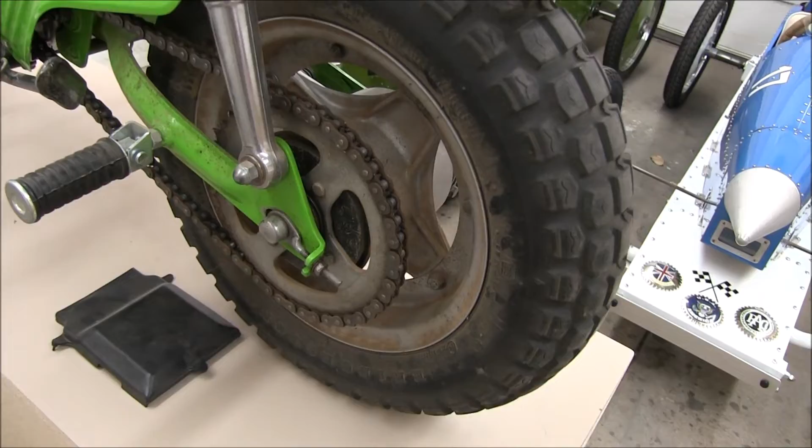Hello everybody. I thought I'd do a little video on my Honda CT70. I've had this thing since about 2003. At that time I took it all apart and repainted it and fixed it up, and I've put about 500 miles on it. It's been in storage for a while. I just dug it out, and you can see it's kind of dirty and needs some service.

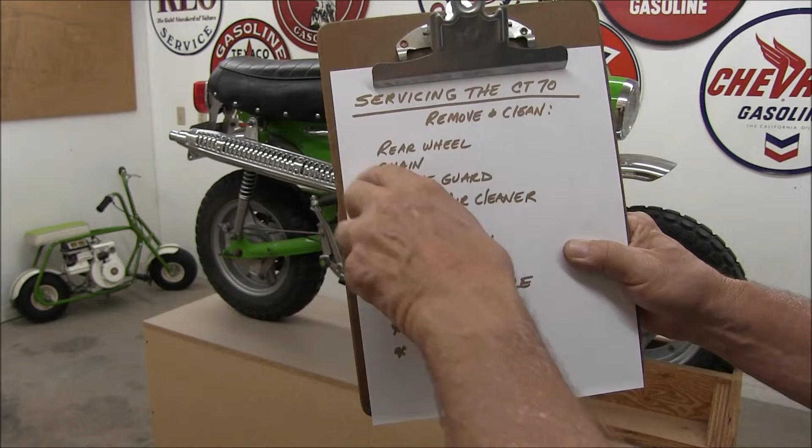So I thought I'd do a little video of the process. Here's the things I'd like to do to the CT70 to get it up and running. I want to remove the rear wheel and the chain, the engine guard, the carb and air cleaner, the battery, and the fuel tank. Clean all these items up, then clean the frame and everything else, reassemble it, get it running, and ride.

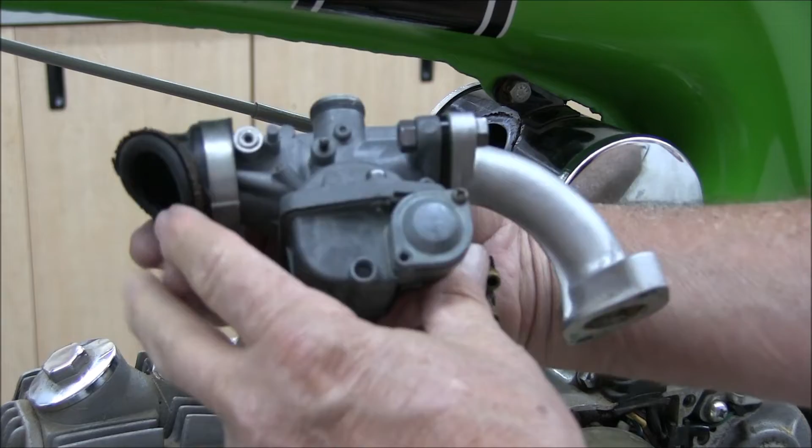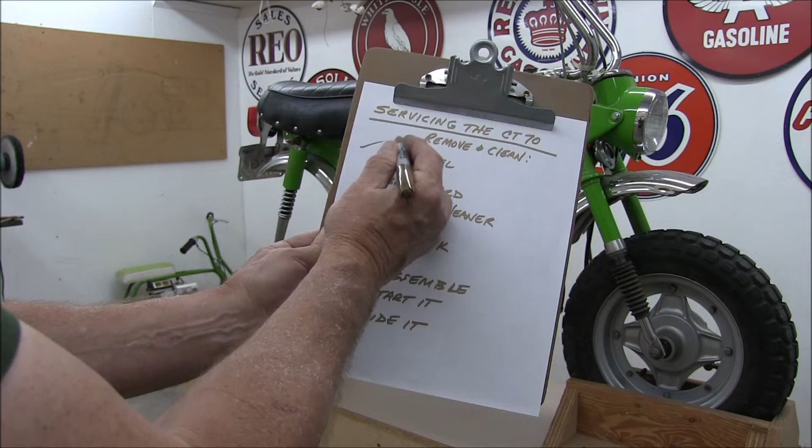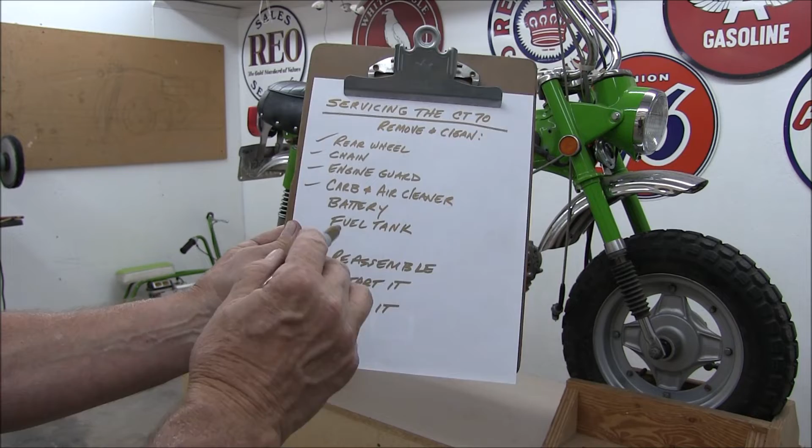Making progress here. Rear wheel, chain, engine guard, carb and air cleaner done. The battery and fuel tank are under the seat, so I'm going to work on that next. But so far so good. Everything needs a good cleaning.

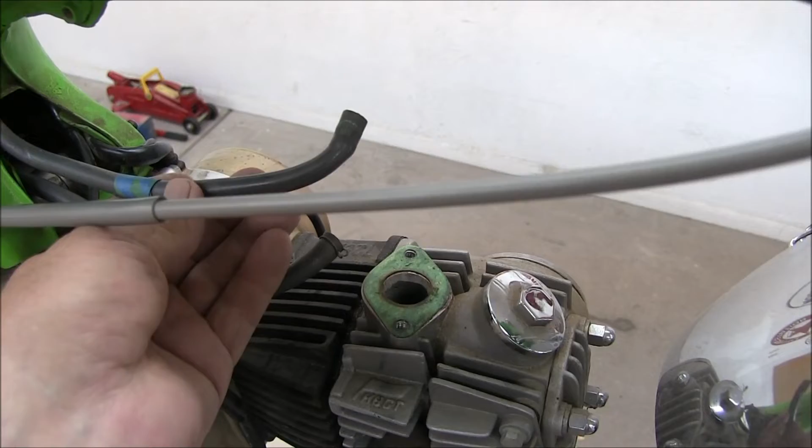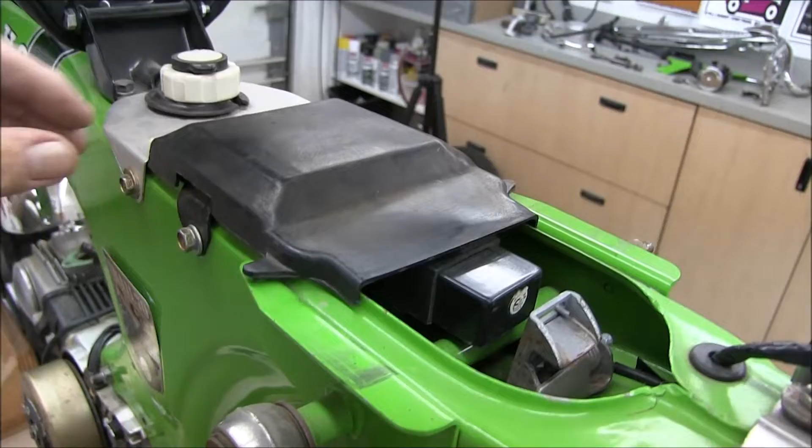So the fuel tank is inside here, and you can see the fuel lines coming out. This blue tape is the line that goes to the reserve valve, the reserve part of the tank. The tank is plastic, so it's underneath the seat. And then we've got this little cover here, and then to take the battery out, remove this plate. This is an electronic ignition for this bike. Anyway, this comes out, and then the tank can slide up and out.

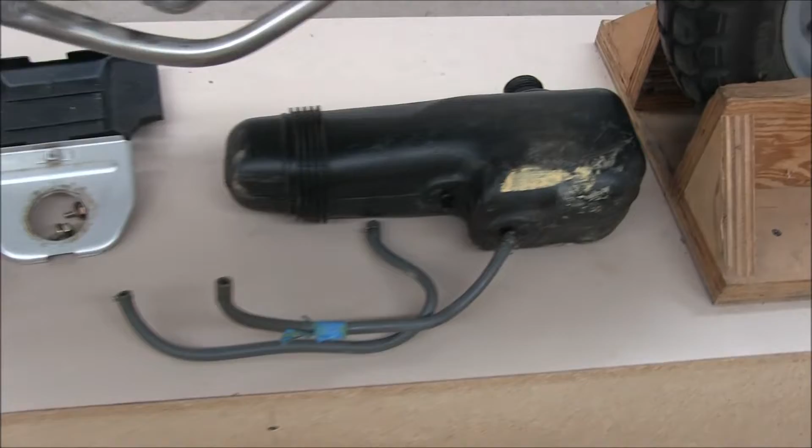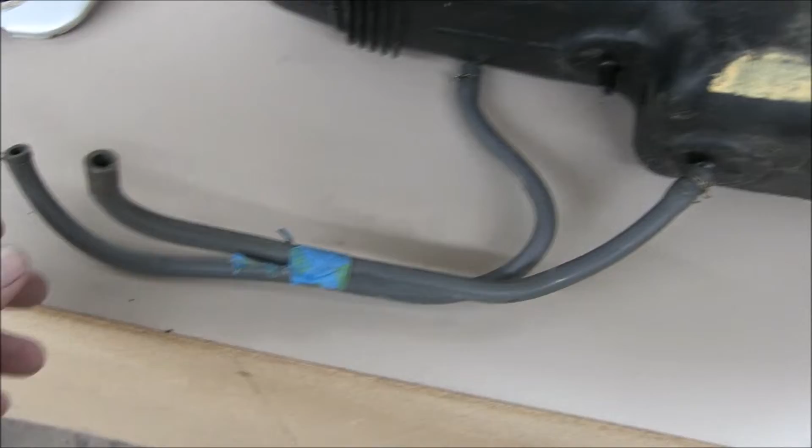So here's the fuel tank. Looks like this is broken right here. This has been in dry storage, hot in the summer for a few years, so these lines are hard. I'll have to get some new fuel lines. I think this is still long enough to work.

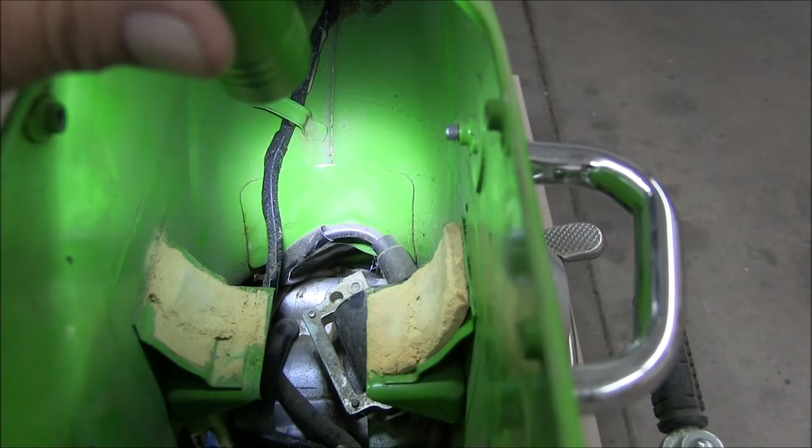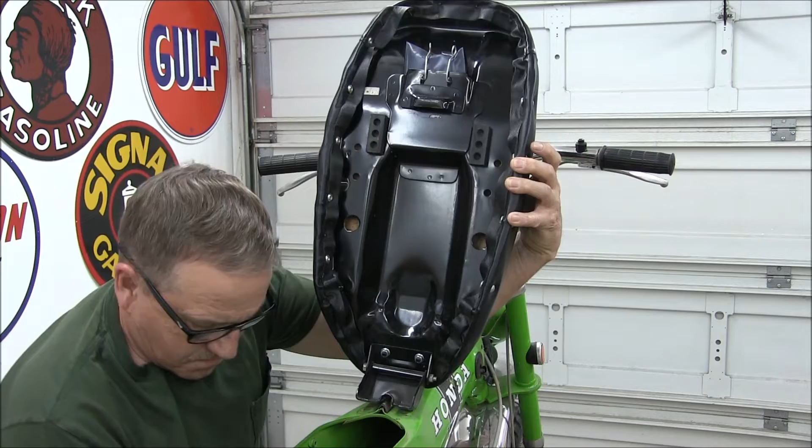This is the reserve portion of the tank. Here's the battery box and the battery. I think everything down in here will clean up all right. Here's all the parts laid out. Everything here will be cleaned and reinstalled. Won't take too long, I don't think.

So a little bit about this particular mini bike. Like I said earlier, I bought this around 2003 and it was a wreck. The engine was out of it in pieces. I think it was red, if I recall. I spent quite a bit of money buying parts for this thing, and I painted it a color I liked. I didn't care about originality per se.

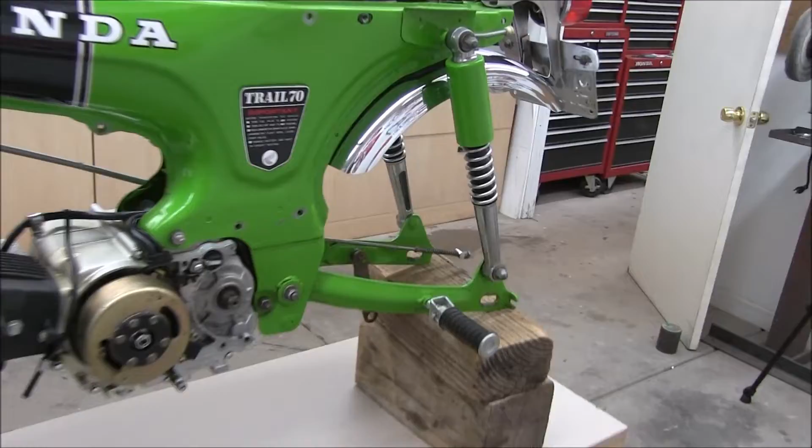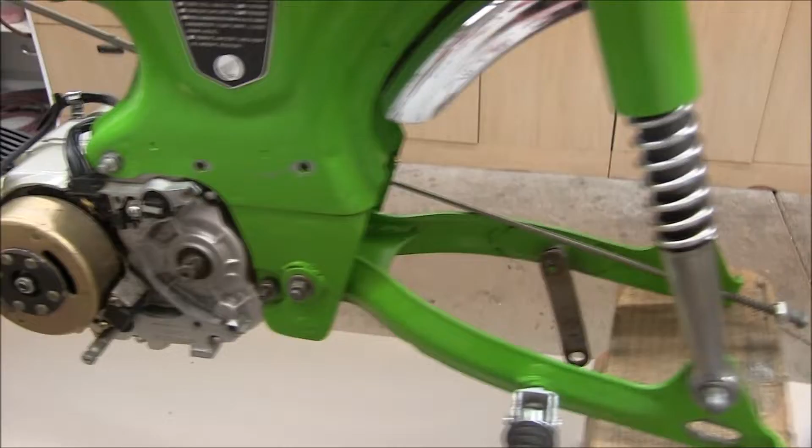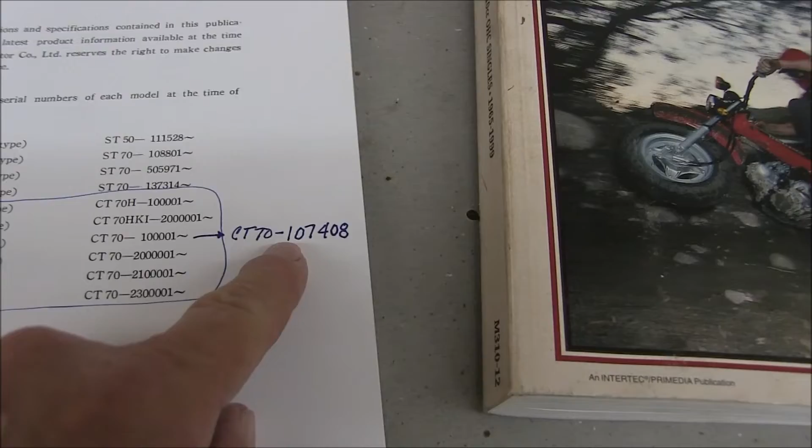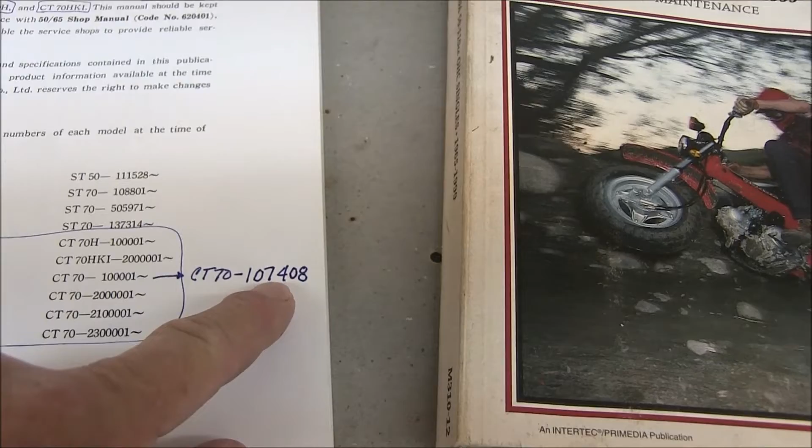If you look at the serial number, I don't know if you can even see that, but it's CT70 107408. So if I go over here, we've got this official Honda manual. So CT70 K0 is what this one is, 107408. So that's in the first 7,408 bikes, if I'm reading that right. So it's an early model. Could be a '69 or '70.

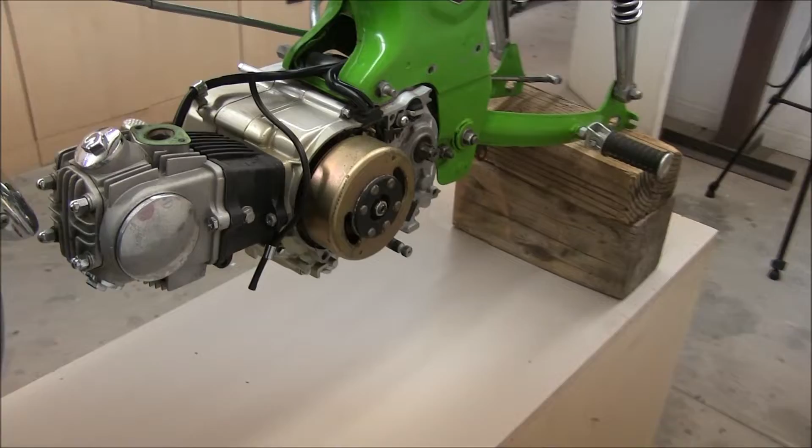Your basic 3-speed transmission. Now the engine that came with the bike was a wreck, so this I purchased, it's a Chinese brand, 70cc. And this is a 4-speed automatic, which I thought would be nice, but I should have got a 4-speed with a clutch. Still, it's nice having a 4th gear. It runs pretty good, it'll run 40 miles an hour, so it's worked okay. I can't complain, and it was a reasonable price.

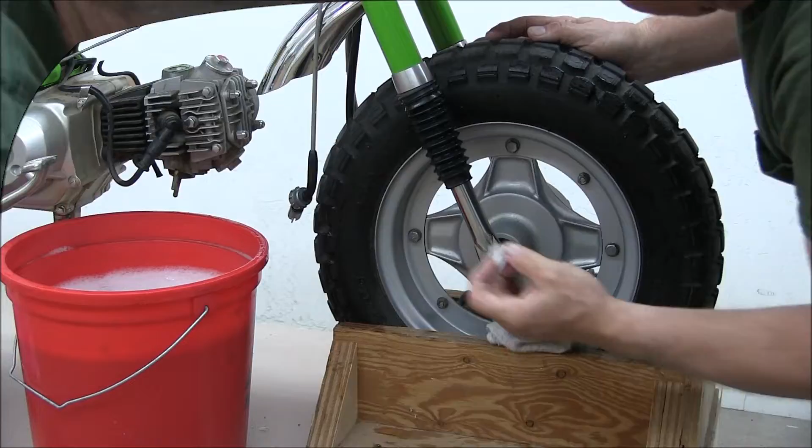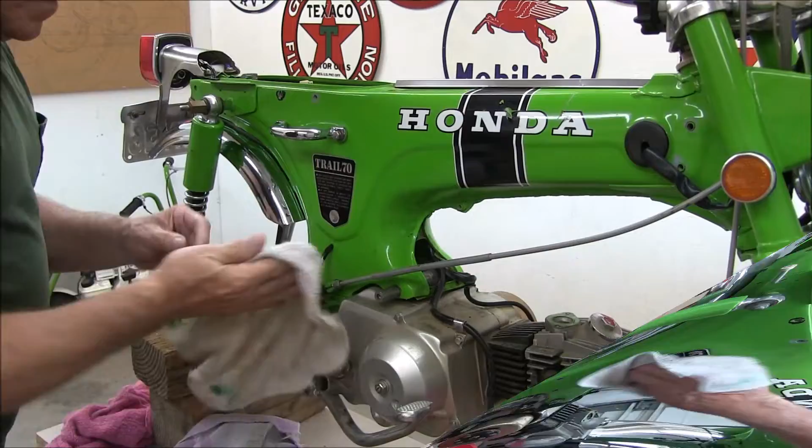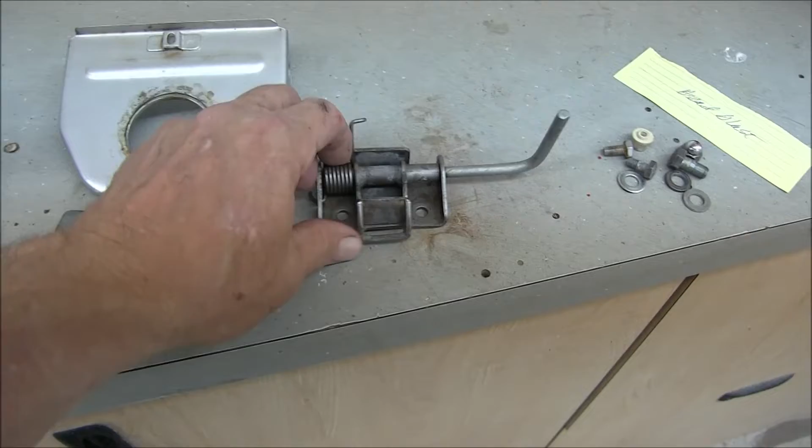Upon further inspection, there was quite a bit of dirt and filth, oil, fumes got up in here. So I decided to just go ahead and pull the motor. There it is over there. Here you can see why I decided to pull it out, it's just filthy. A couple of the items have some surface rust and corrosion, so I'm going to use the bead blaster, glass bead blaster, to clean it up.

The bead blaster does a nice job of cleaning up the parts. I'll just spray paint them, that'll seal them up again. So I'm cleaning the rear wheel now.

I've taken off the snap ring so I can take off the sprocket, and then the dust cover. And then there's these little rubber cushions in here, they just pop out. They're just in there loose fit. So I just have to clean all this up and it's ready to go.

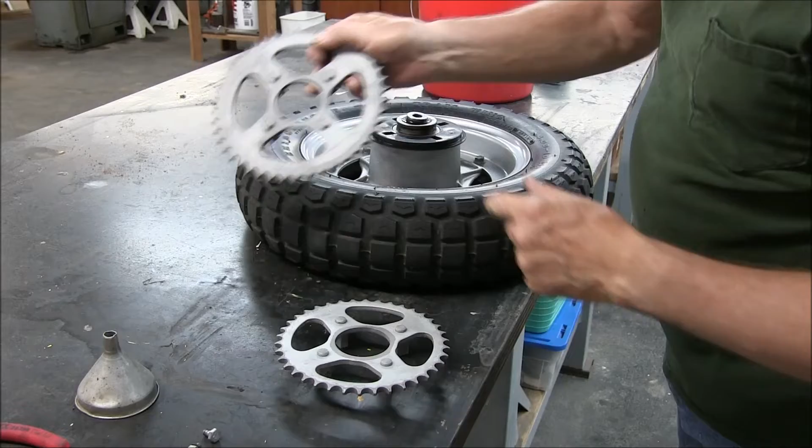Alright, I have things cleaned up now, so I can put it back together. One thing I'm going to do is change from a 45 tooth rear sprocket to a 38. This will give me more top end. This thing would only get up to about 40 miles an hour.

We mostly did trail riding and it was good for climbing hills because with this sprocket here you got good low end torque for climbing. But I like to go a little faster, so let's see what happens.

Okay, alright. Yeah, that'll be fun to try out. Okay, and then I cleaned this up and it's ready to go.

Okay, so the rear wheel is ready to reinstall.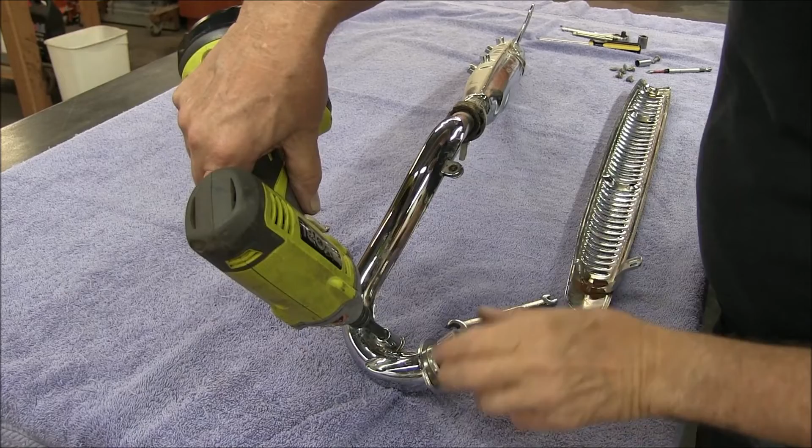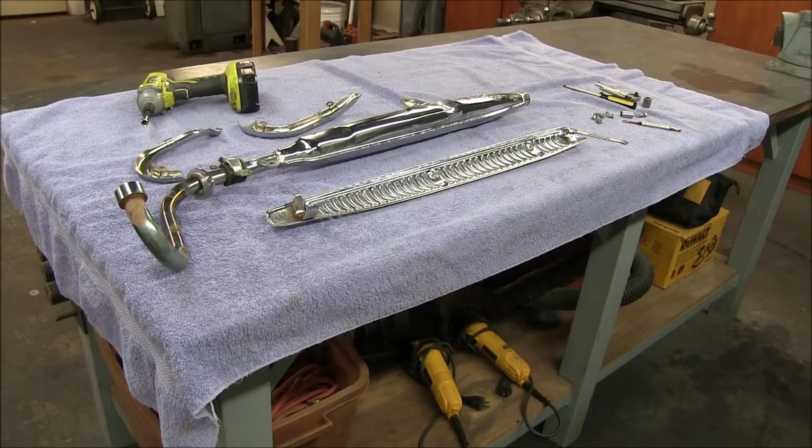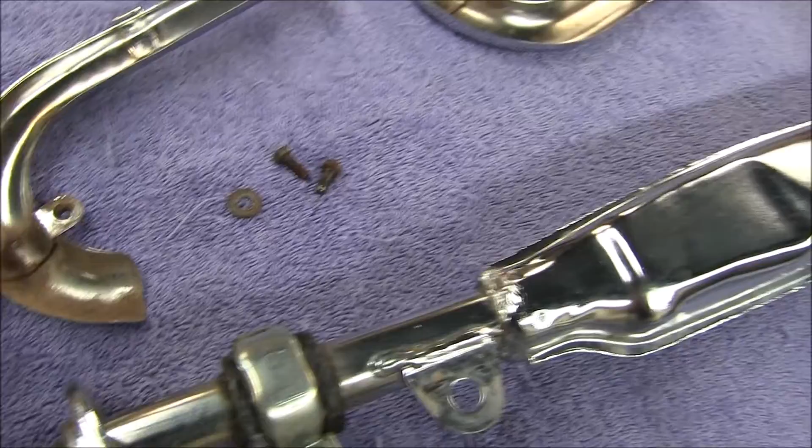Back when we were riding our mini bikes, we would ride rain or shine out in the trails. So dirt and corrosion got into a lot of areas. That's why I wanted to take this apart to get to all of this. Just get it nice and clean. Put it back on the bike, fresh.

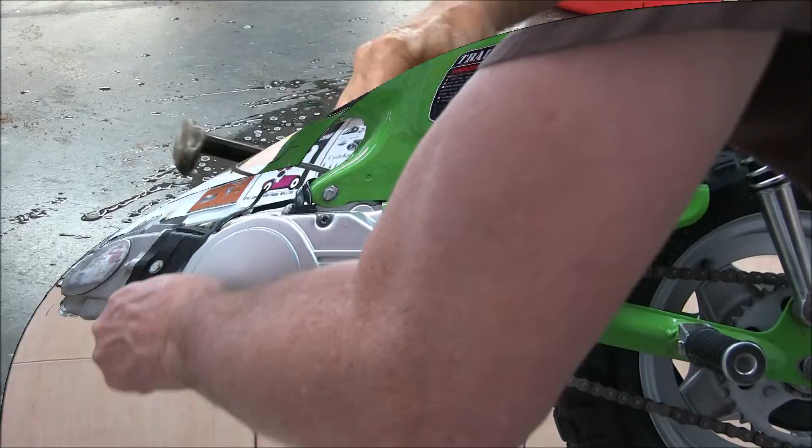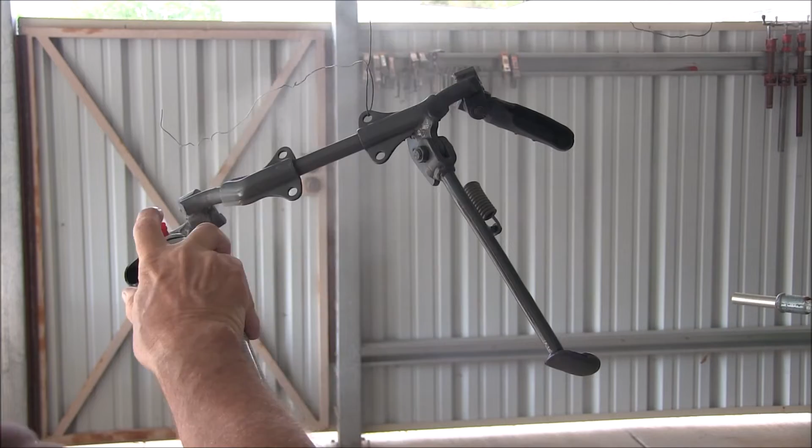Along with the battery, I received some other things I needed. I needed some new fresh fuel line. I like this gray fuel line, it works well. It also came with these little fuel line clamps, which work well with this particular tubing.

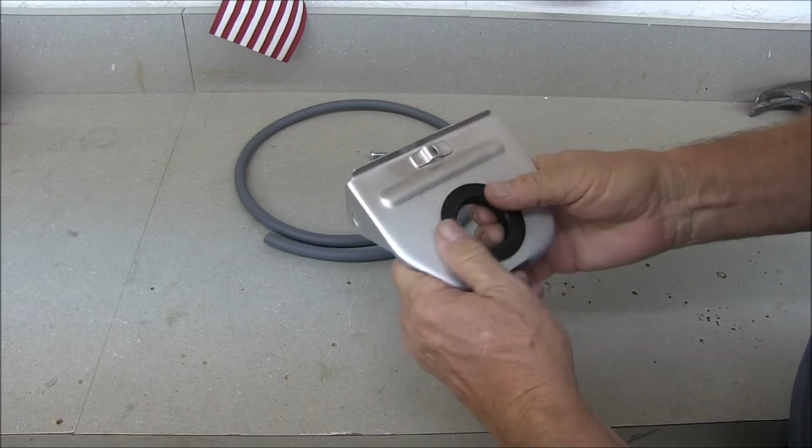And then I have a new screw for the side cover because the one that I currently have is all messed up here, so I got that. And then I have this new grommet for the gas tank, which fits in here. Oh yeah, that is nice. All right, glad to have that.

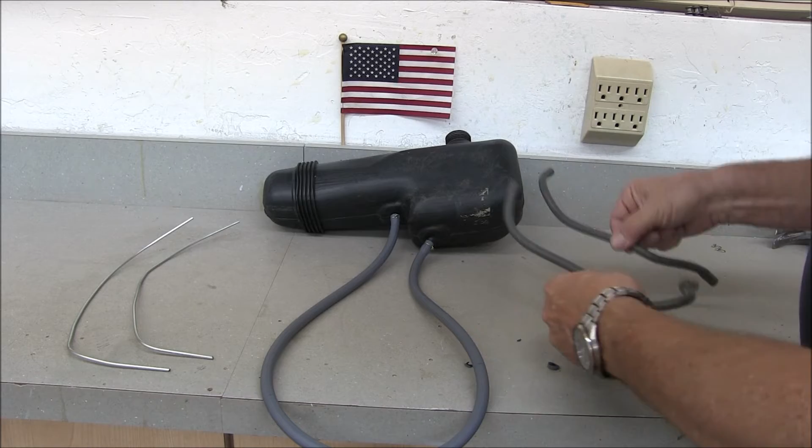Moving on. So here's the old fuel lines, and I've attached the new one on there, and I'm just going to cut it right in the middle, and that'll give me plenty of extra.

Okay, I made these, and I put them inside here, put a little tape on there, and then I can fish them through the body as I'm sliding the tank on. I am almost ready to put in the tank. I taped these on so I could fish the lines through.

I cut a couple of foam pads with some spray adhesive. Got to stick those in, and then I can slide the tank in.

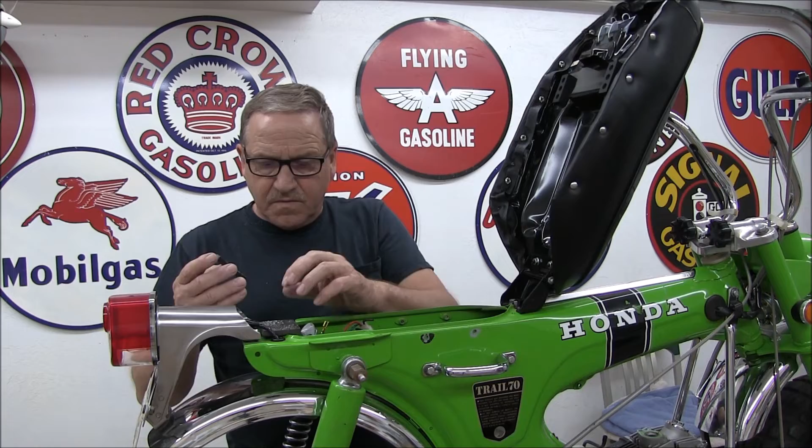Okay, I've fished the hoses through and carefully am working it in. There's electrical I have to get past.

Okay. Yeah, that feels pretty good. Let's see, this will basically locate it. Okay, that's roughly in the right place.

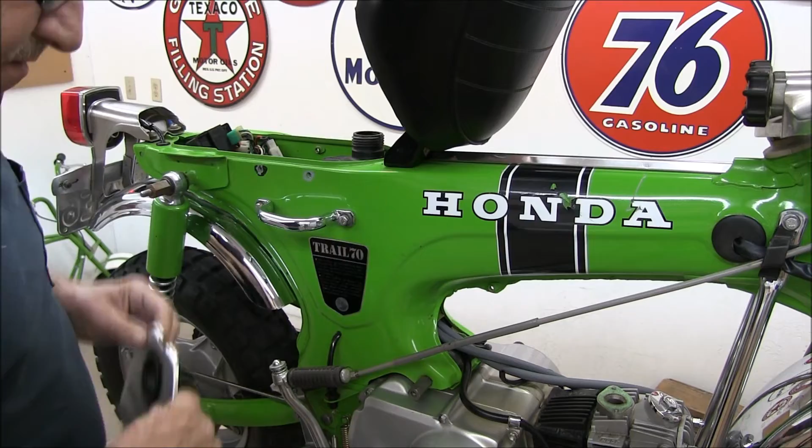The tank is in place now, and here are the hoses. This one with the X, that's the reserve line.

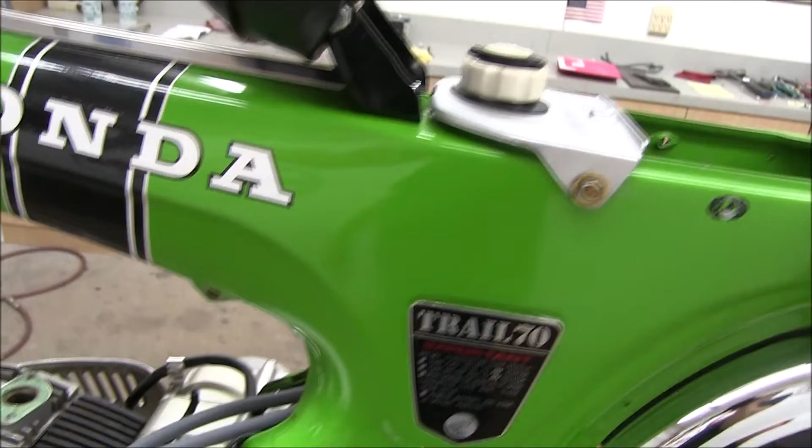I installed the new grommet and the plate, cleaned up the gas cap. So I'd say that installation looks pretty good. I'm happy with that grommet.

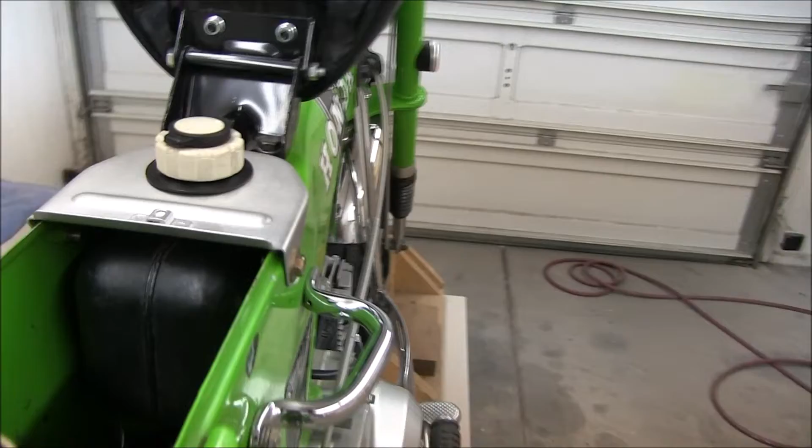Yeah, that's nice. So I received my new battery, basically the same as this one. This battery is about 15 years old, and it has a charge about 2 volts. I tried charging it up, but it wouldn't take it.

But if I go over here to the new one, 6.29 volts. These are far superior than the lead acid batteries, that's for sure. All right, I'm going to put that in here directly.